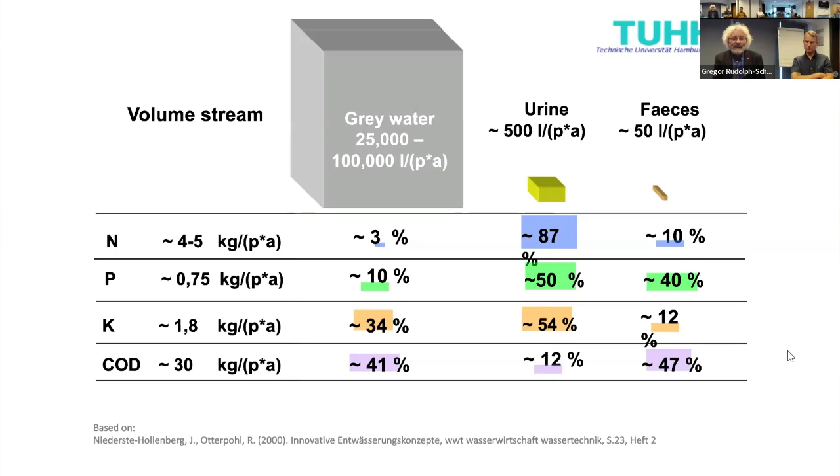So, my first point, what is in blackwater? So, we have grey water and we have blackwater, and blackwater is urine and feces, and this is separated here because you can clearly see the ingredients are completely different. And to make it short, in grey water we have the water, in urine we have the nutrients, and in feces, we have pathogens and antibiotic resistance. So the question may arise, why do we mix all these different streams which are separated already?

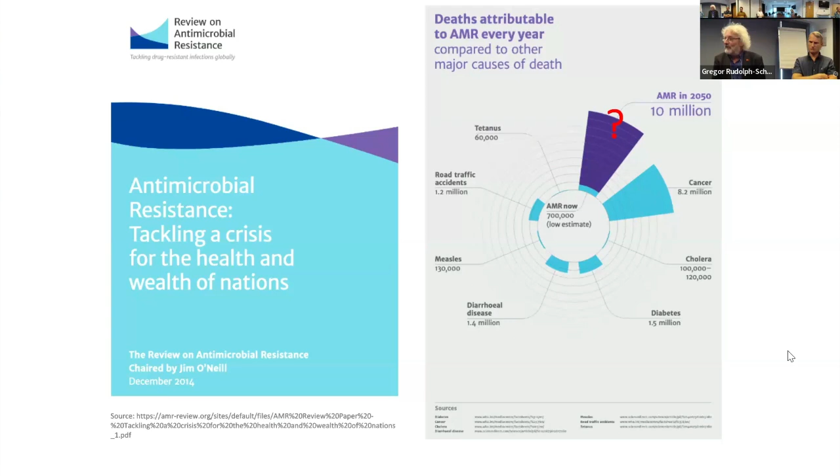And we focused in the project both on grey water and the mixture of urine and feces, which we call blackwater. And there are many studies about the risks of antibiotic resistance. I just quote one, and this says that in 2050 we can expect 10 million additional deaths because of antibiotic resistance. This number was questioned, but there's a recent, more detailed study, and they propose 8 million people. So not that big a difference, and anyway a big deal.

So what are the pathways? And these are the red arrows. So we have entries via feces. This is the main entry path. We have entries via hospitals also, but the majority is via feces of normal people. And if we have a combined system, which you can see on the left side, then we have overflows. If it is heavily raining, then we have this overflow, and then we emit pure wastewater mixed with rainwater to our waters.

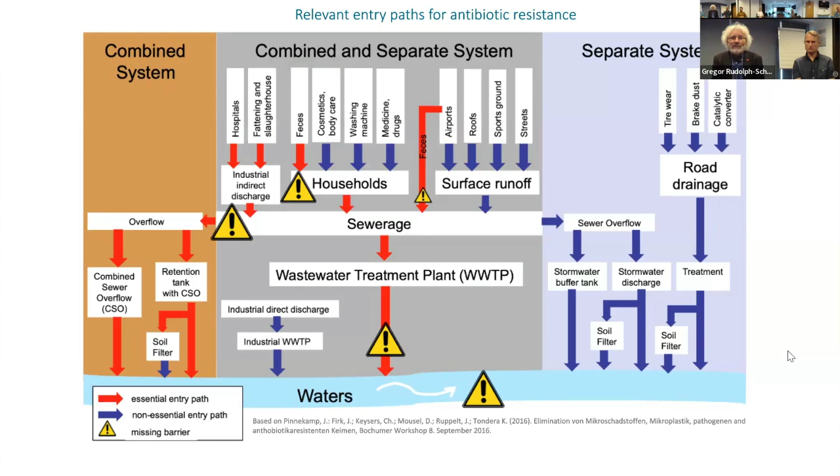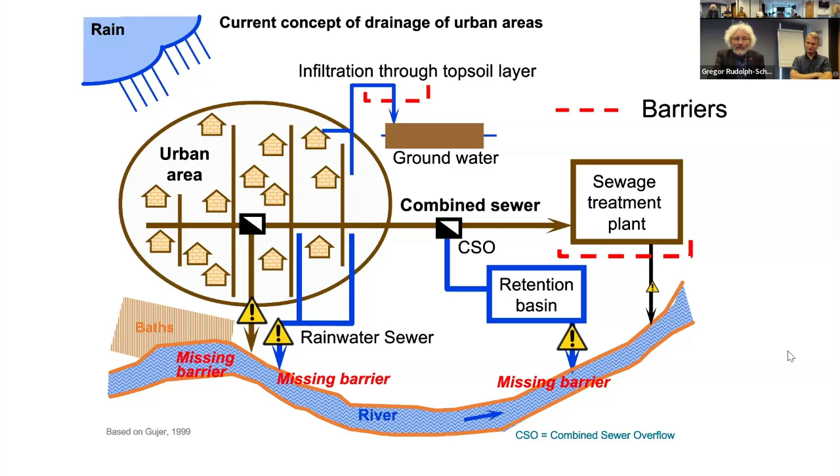And this is a major source of antibiotic resistance. And if you see this figure of our urban drainage system, then you see in brown all these combined systems, and then we have the overflows, and we have missing barriers against these hygienic materials and others. So even if we do not treat rainwater properly, we will have a missing barrier. And it is very important to have barriers. And how can we produce barriers?

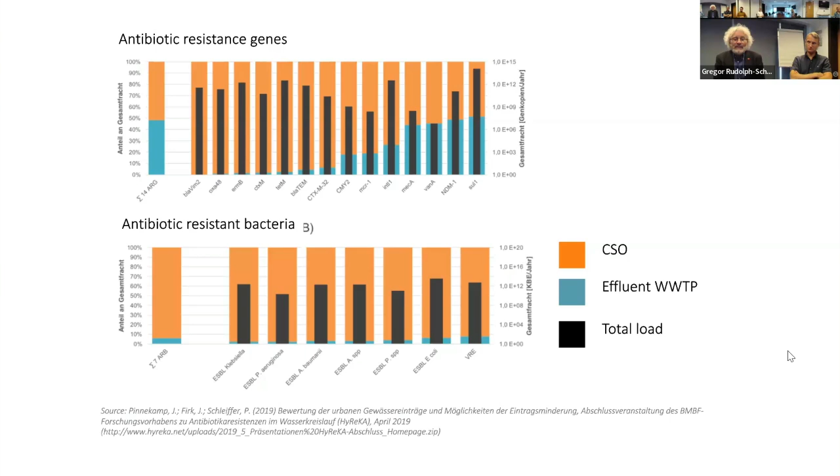But before I come to this, just the results of a recent German research project. The graph may be rather complicated, but I can conclude in one sentence. They found out that combined sewer overflows are the main source of antimicrobial resistance in waters. So we have a larger emission than from the treatment plant itself.

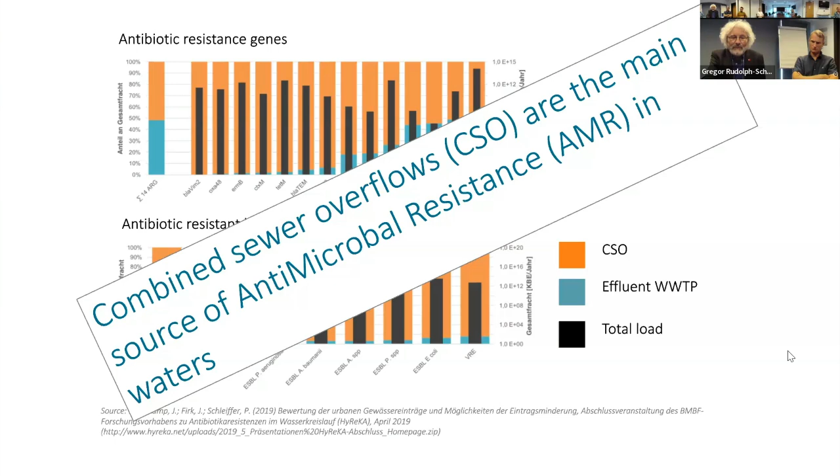So if we could have a concept of a different system, and you can see it here. So if we would not mix any black water with the rest of the rainwater, and you could treat it separately, that would be a first step. If in a second step, we even could separate consequently the rainwater so that we have a drainage system which we do not call combined, but separate system, then we would have no overflows anymore. And this would be the ideal system.

And in the first step, we just could separate black water. Then we would solve the hygienic problem and the antibiotic problem in the first step. And in the second step, maybe we have this very sophisticated system. So, but separation is not all. We have to treat black water and grey water in a manner that we really can make use of the water for grey water and avoid the emission of pathogens from black water.

And in the next presentation, Hamza will talk about the black water treatment and give you more insight into this. Thank you for your attention.

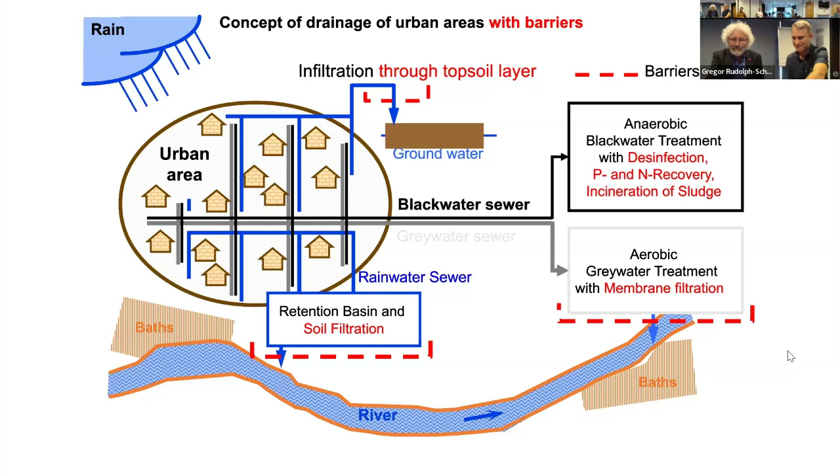Thank you very much, Gregor. So we will move on then from why we have the separation of black water in the upstream system in the households. And then we'll talk a little bit about how we in the Anchor demo sites treat black water. And when we're treating black water, we can not only get the benefit then of the decreased spreading of antimicrobial resistant genes, but we can also have the resource recovery in the treatment plants.

So I hope you're enjoying your lunch, because the next 15 minutes will be quite rapid indeed. But you can always come back to the presentation afterwards, and you're also very welcome to visit any of the Anchor demo sites to watch the numbers I will present in real life also.

So, the main point with blackwater, if you look from a wastewater treatment perspective, is that it's a very smooth wastewater. It's a very nice wastewater to work with. You have very low flow rates. They are very equal flow rates all over the day and over the week. So stable flow rates throughout the year, and they're also very stable in concentrations. So we just recently finished a master thesis where we looked, for example, into the Helsingborg demo case, and we could also confirm that we have this very small variation in the flow rates and in the concentrations.

The concentrations are also rather high. It's around 9,000 up to 10,000 milligrams of COD per liter, 120 milligrams of phosphorus, and around 1,300 of total nitrogen. So it's quite nice concentrations of both nutrients and organic material, and more importantly, stable in concentration. So you can have a solid treatment of these systems.

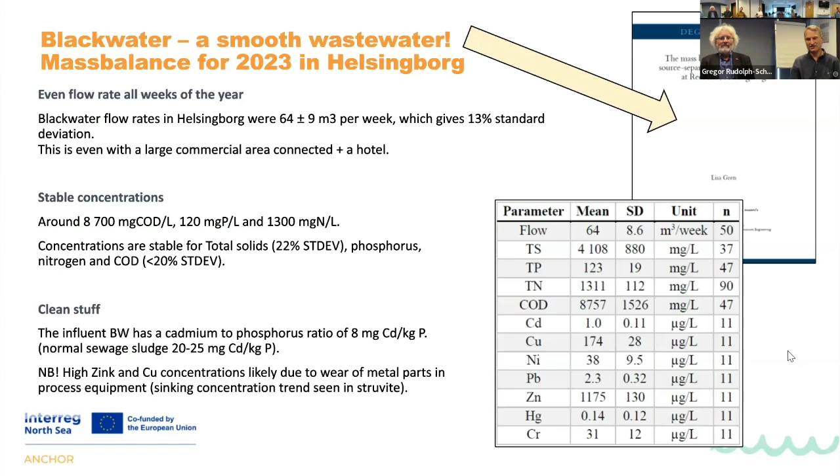So the blackwater treatment chain: already for 25 years on the university side, it has been suggested that with blackwater you should actually have anaerobic digestion as the core process to treat the blackwater. So that is different from a normal wastewater treatment plant where the activated sludge process is more in the center of things. And the anaerobic digestion chain is more similar to the sludge treatment system of a normal wastewater treatment plant. So you have the anaerobic digester and you have the nutrient recovery, etc.

The difference is, of course, that you have much more of the nutrients in the blackwater than in the sludge train of a normal treatment plant. So almost all of the nitrogen, for example, you have in the blackwater.

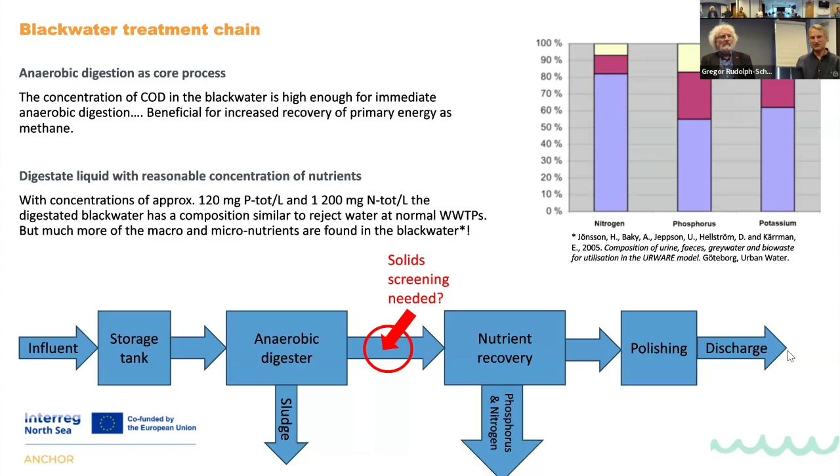So here you can see the treatment train in many of our demo sites. So a storage tank to equalize the flow, no screen, and then you have the anaerobic digester where you separate the sludge and the organic material. There might be need for solid screening, which I will tell you about shortly. And then we have the nutrient recovery steps. And in the end, if you want to do a direct discharge, you can also have the polishing steps.

So the anaerobic digestion stage, we know that blackwater is, and it's already proven now in our demo sites, suitable for anaerobic digestion. You can get a very good separation of the COD, but you need to have these sludge separation digester types, like the UASB digester, because you need to separate the solids and the hydraulic retention time from the solids retention

time in the digester. And then you get around 3 cubic meters of biogas per cubic meter of blackwater, and that is equal to an increase of around 60 to 70%, which we have now proven during the last year in Helsingborg, that we actually get this increased biogas production, which is nice.

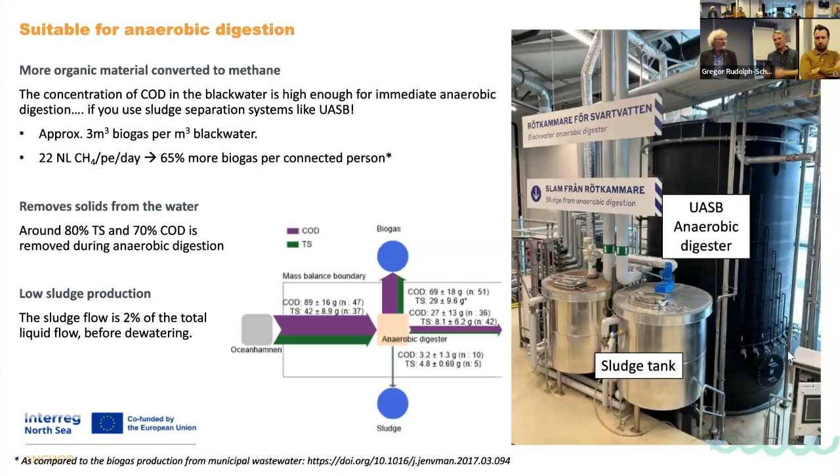We also see that we separate a lot of the solids, so around 80% of the total solids and 70% of the COD. You remove it through the anaerobic digestion, but into a very small sludge production rate. So actually only around 2% of the total liquid flow of blackwater, which is already low to begin with, is leaving as the sludge, which is very nice because that means most of the nutrients actually pass through the digester, which is what we want.

So the effluent of the digester then, we know now that we have separated most of the solids from that stream, which is nice, and most of the organic material, but we still have most of the nutrients in this effluent. So we have almost all of the nitrogen and a sufficiently large amount of the phosphorus still left in the effluent water. And those are also in mineralized forms, so they're good for extraction into nutrient products, like with struvite precipitation or ammonia stripping that we do have.

However, we have also noticed throughout the years that you can also have solids washout from the digester. We don't really understand what is the main cause of this sludge washout from the digester. It happens from time to time. So then we can have the solids concentration increase in the effluent, which of course is detrimental if you want to have a nice and easy running nutrient recovery downstream.

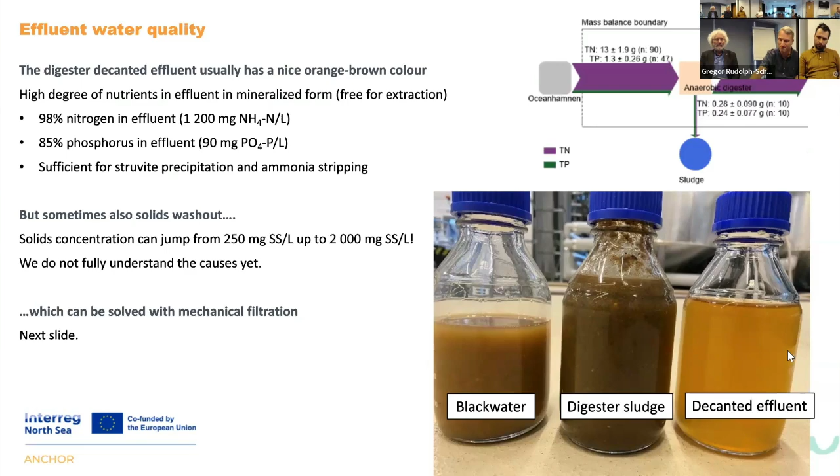However, what we have found is that even if we don't understand the cause of this, we know how we can remove the problem, which is, of course, the good engineering approach. So we have tested both the drum filter and the microfiltration as a sort of screening after the digester before the nutrient recovery. And you can see on this photo the results of both.

So with a drum filter, you have a 40 micrometer cloth screen. And then with microfiltration, you can go down all the way to a 0.1 micrometer screen. And if you do that, you have no solids. It's beneath the detection limit of 10 milligrams suspended solids per liter. But already with the drum filter, we noticed that we get a stable effluent just below 100 milligrams of suspended solids per liter. And that is sufficient enough for the downstream pretreatment.

And we also know now from over 9 months of operation that it also can handle very high solids loads if you get that sludge washout. So that is a very nice and easy to operate system which we are making now a permanent installation in the Helsingborg demo case. And I know they're also building it in one place in the Netherlands.

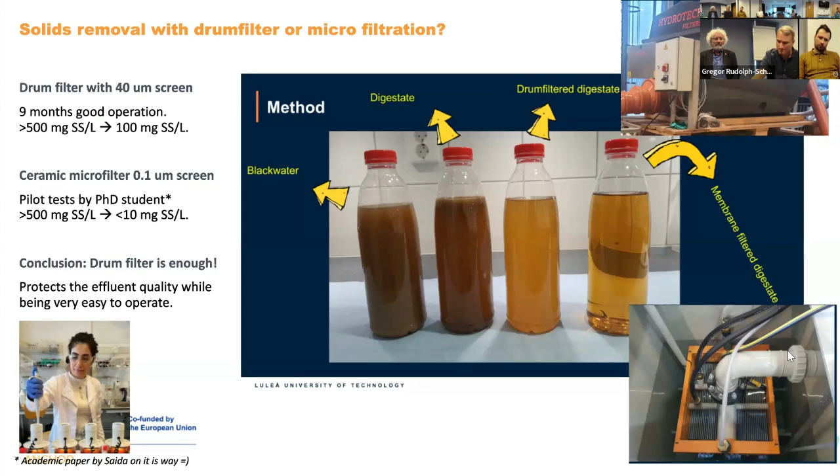So if you move to the recovery of nutrients, what is nice with blackwater is that you can have the recovery of nutrients in many different ways. You can have the total liquid fraction recovery, which we do not actually do in the Anchor project. It's more for the rural areas where you're close to farmland. So then you can do the wet composting with urea addition, or you can have the concentrate recovery of the whole liquid stream with, for example, distillation or freeze concentration. That we have tested in Helsingborg, and it's also been tested in the United States.

Then you also have the sludge fractions, which we do monitor in the Anchor project. So we know that the sludge quality is good, and that it is cleaner than normal sewage sludge. However, in our demo sites, the volumes we produce are actually quite small, so around 2 cubic meters per week. So we mostly monitor this sludge. We actually don't reuse it in agriculture in a continuous way.

What we do, however, is the extraction of nutrients. That is our main focus with the struvite precipitation, both in the Ghent demo site and in Helsingborg, and the ammonia stripping, which we do in Helsingborg.

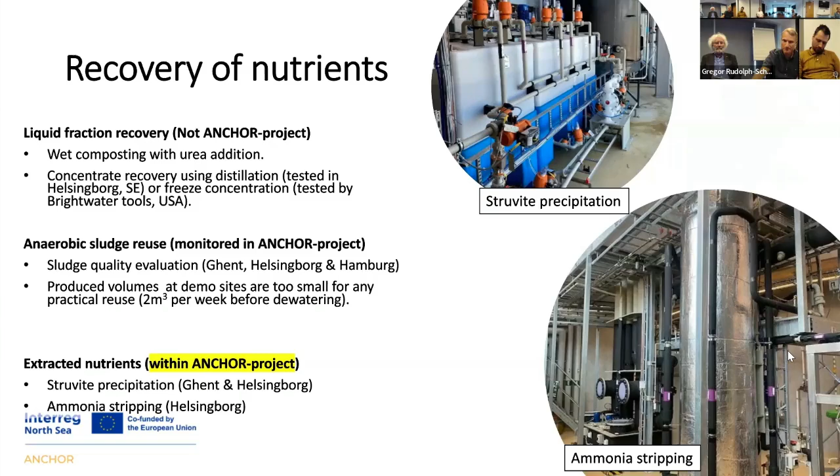So some results of the struvite recovery so far. What we can say is that it's a quite low cost technology, and a low chemical need as well. So you dose some magnesium chloride to get the struvite precipitation with the phosphorus. And that has been around on blackwater in a few places.

We also know that in the EU, this recovered fertilizer is in the EU fertilizer regulation. So that means you can both get the end of waste status, and it's also approved for ecological farming if you go through this EU regulation. So that's a really nice pathway to recovery of nutrients into farming.

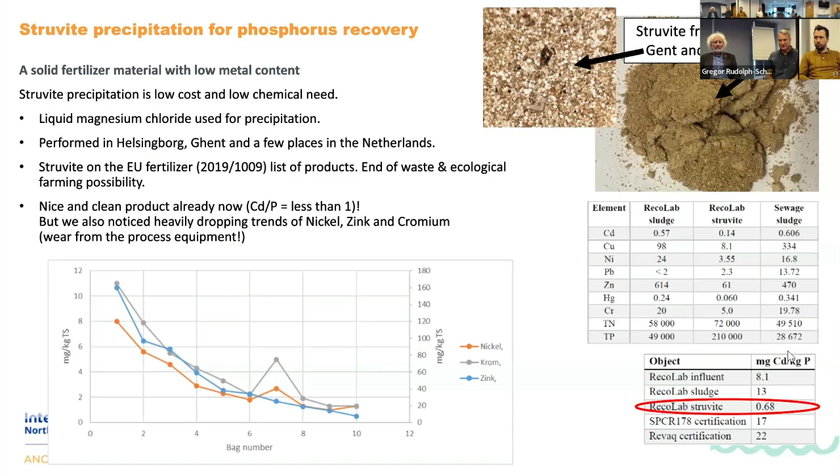So from the results we have so far, we know it's a clean product. And interestingly enough, we also noticed the decreasing trends from the beginning of operation. So that is likely wear from the process equipment. As you can see, the anti-corrosion protection of nickel and zinc and chromium, etc., leaching into the first bags of struvite. But even with that happening, we can see that the concentrations of, for example, the heavy metals in the struvite is very, very low.

For the ammonia stripping and ammonium recovery, ammonia stripping, I would say, is a proven technology, and that's been around for many decades. But it's also quite high in chemical usage and operational cost, because you need to add the sodium hydroxide, the sulfuric acid, and heat, etc. Even with all that taken into account, there is still a positive climate effect, because you also have to compare to the fossil nitrogen cycle, which you would otherwise use to create fertilizer. So even with this technology, you still get a positive climate effect.

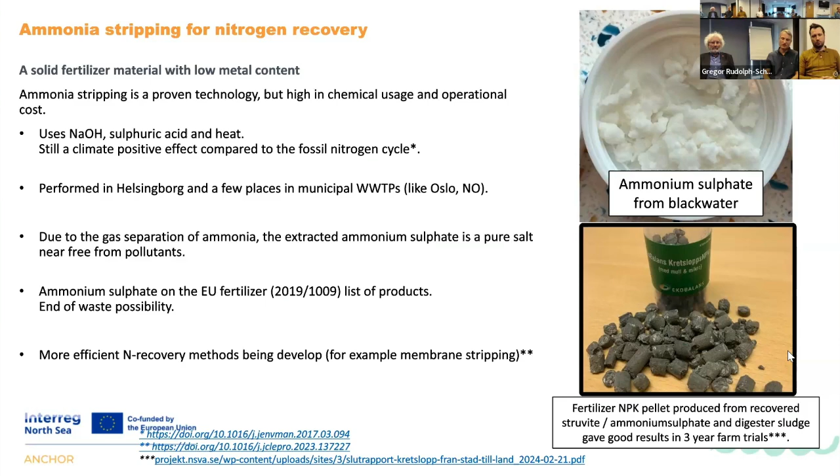It is done in Helsingborg, but also on a few municipal wastewater treatment plants, like the one in Oslo, for example. And the product you produce is a pure salt, as you can see here in the photos. And it's also on this EU fertilizer regulation list with end of waste. But I would also say that this is also a quite labor-intensive method, and there are more efficient nitrogen recovery methods being developed. Membrane stripping is one of the promising ones coming up. We've also tested the end products, these fertilizer pellets, and we have good agricultural yields for these nutrient products, if you're interested.

So the polishing is not really the central part of the anchor project, I would say. But if you have the direct discharge of blackwater, you also need the polishing, because if you have nutrient extraction, you still have some remaining phosphorus and nitrogen in the stream that is not really economically viable to recover. So in Ghent, they do mix the blackwater effluent with a greywater effluent to treat them and decrease the nutrient concentrations in the activated sludge system. And then they also have the color removal before the entire wastewater stream is recovered into the soap factory.

And in Helsingborg and Hamburg, polishing is not really part of the demosite process as of yet, because we're still working with the upstream process. But it's still important to mention that you need this. And for example, removal of pharmaceutical residues is not in this anchor project, but we have a separate LIFE application on this topic. We see that anaerobic digestion is good for removing some pharmaceutical residues and pathogens, but it will not be a complete treatment. So likely we need a dedicated process step, like activated carbon or carbon filters, for example.

So the outlook, I would say that what we see in this anchor project and over the past years is that we're moving now from university research into municipal operation of blackwater treatment. And as a utility operator that I am, I would say that the smooth flow rate and the stable concentrations in blackwater is what has really surprised me and what I really, really enjoy with blackwater. So on the downstream treatment side, there are benefits to work with the blackwater as a wastewater.

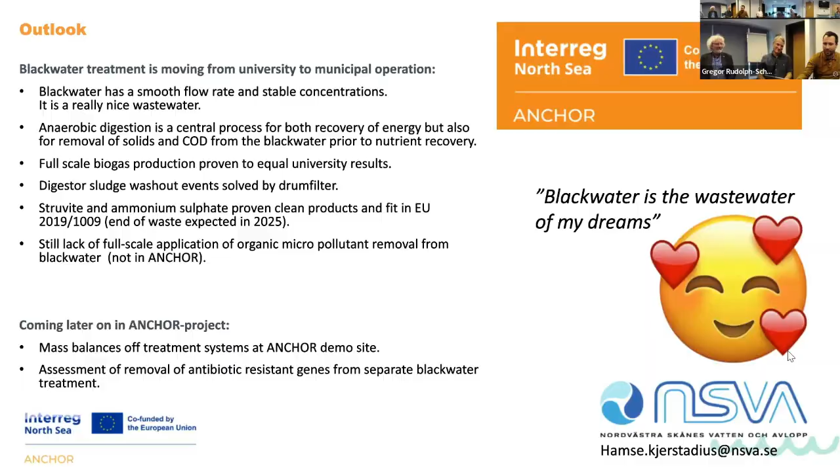Thanks a lot for the introduction, Hamse. My name is Dries Seuntjens. I'm a project manager for the case of DuCoop in Belgium. And I would like to talk a little bit about the economy in source separation systems.

So let's start off with the title of this talk. Where is actually the economy in source separation systems? So where means, what has value in our source separated streams that we are separating, and why is there value in it? Those are important questions to answer. Economy means market. Is there a market for this value? If we value something, it doesn't mean there is a market for this value.

And most importantly, what do we mean with a source separating system? I think Jörg explained it very well. It is separating the different streams at source and then using technology, like, for example, decentralized on-site water treatment, to recover the things and create value on-site and also for society. So let's try to answer these questions.

Where is the economy? And I think one important aspect is location. Every one of us is living in a different part of the world, and each location has its own economy, its own market. And within that economy, there is also you yourself as an individual, or as a group of people, a group of flats, or a district which is organizing itself. And so different solutions on source separation can happen on an individual level, where the financing and the responsibility is more on that individual level.

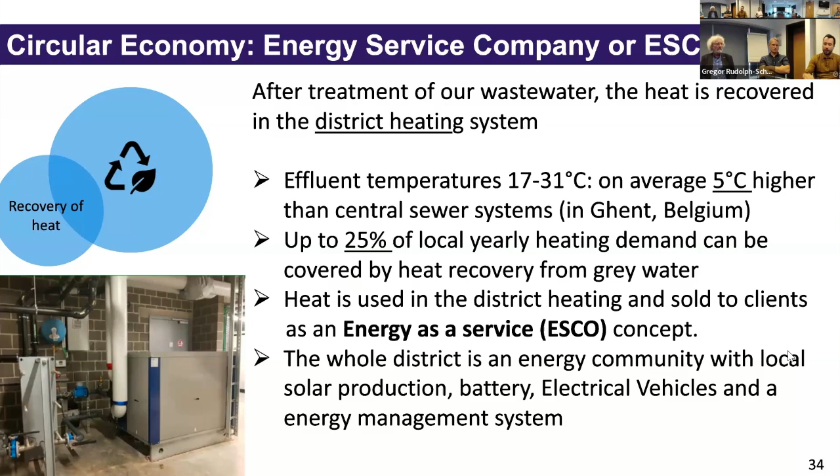Second example is the water service company. On a utility level, you would just say somebody who is managing a wastewater treatment company. So what we do here is that we treat our blackwater, kitchen waste and the grey water on site, and the water is reused in the nearby soap factory of Christeyns.

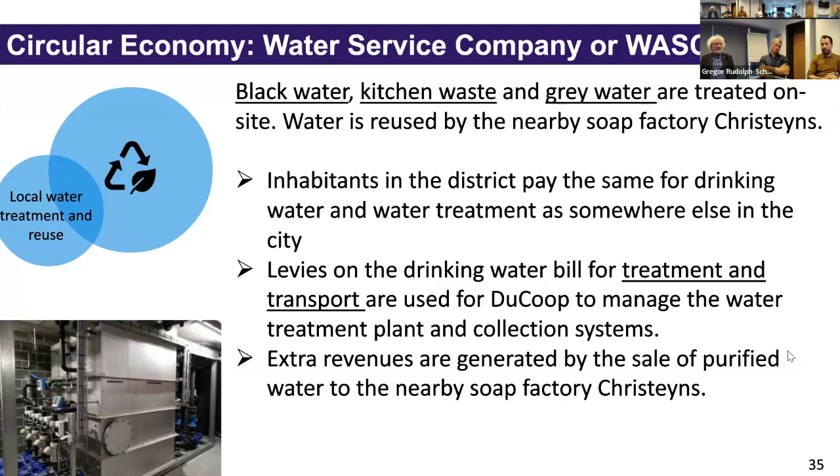So how do we manage to operate our wastewater treatment plant? The inhabitants in the district don't pay anything more for drinking water and water treatment than they would living somewhere else in Flanders or in the city. But still, when they are paying their drinking water bill, they pay levies for treatment and transport of the water. And this is used by DuCoop to manage our water treatment plant and collection systems. Extra revenue we create by the sale of the purified water to the nearby soap factory, Christeyns.

A third aspect is the waste service company, and that is the processing of the kitchen waste that we do. You can see there a picture of a collective kitchen waste shredder, which is installed in different locations in the district, where people can bring their kitchen waste and it is shredded and then transported to our water treatment plant. Again, the inhabitants don't pay more for this service than somewhere else in the city, but the levies are again coming to DuCoop to manage and operate our systems. Extra revenues that we generate by the production of biogas out of the kitchen waste are then further used to operate our systems.

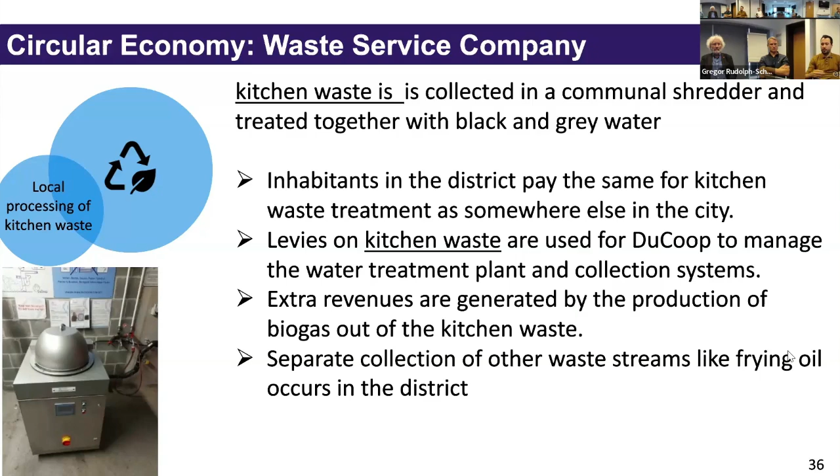And so potential revenues on a city or country level are reduced heat-related health problems, which are going to become a very important aspect with climate change and adaptation. And if we have nice urban greenery around, it will create increased happiness and productivity of the inhabitants and a larger valuation of the real estate present in our city.

A second aspect is the reduction of sewer overflows, as already highlighted by Jörg. We can say that the last 4 or 5 years we had very limited use of the central sewer connection. It's still necessary for an on-site water treatment plant to be connected to the sewer for maintenance or other aspects, but we have much more limited use of this connection, and this can help the city to adapt its system much better to reduce sewer overflows.

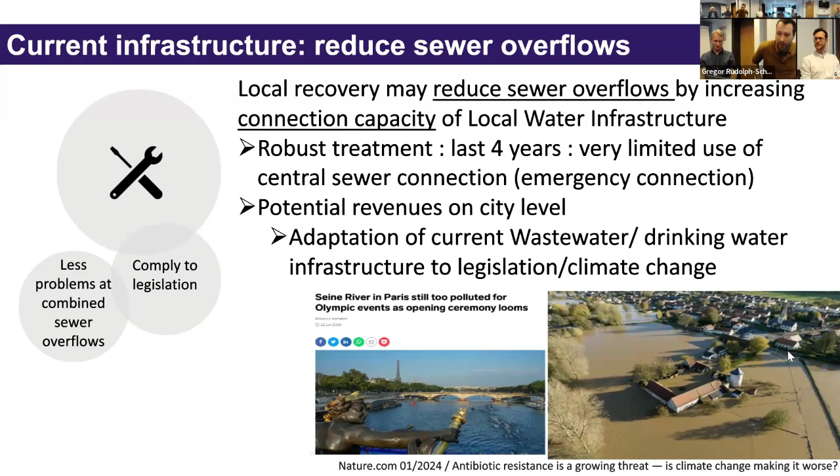Things you don't want to happen during the Olympic Games, but it happened. And some other pictures of last year, large floodings in Flanders. Things you don't want to happen, as these sewer overflows create risk of pathogen spreading.

And then the last one is new city developments. This local recovery may also increase the connection capacity of local water infrastructure. Within the Anchor project, there are new city developments both in Stockholm and Helsingborg, and there the municipalities see that the current sewer system is actually running at its limits to support these new districts. So they are looking into also implementing local treatment systems there. So again, the potential revenues are the avoidance of changing the current wastewater or drinking water infrastructure to support those new districts.

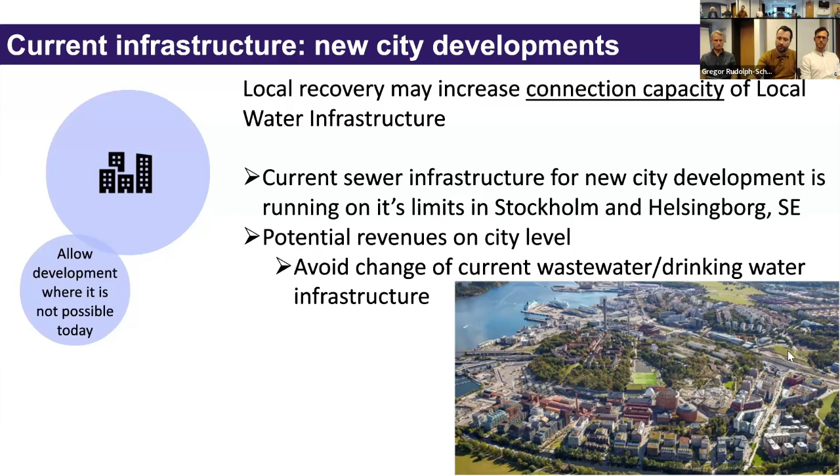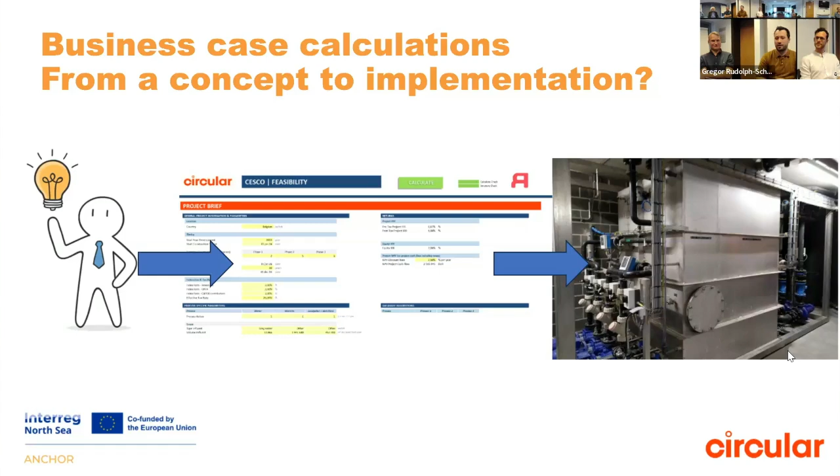So we have all these ideas. How do we go from, maybe you're working on a certain project, how do you go from this idea of implementing source separation to an installation that is operational? In the middle, you need a good business plan, a good business model on how to calculate these different scenarios. I'm not going to walk you through this whole business plan and model that we developed, but I'm going to show you some results of scenarios which indicate under certain conditions where source separation can be feasible.

The financial model is built on different aspects that are linked in between. So we have different pillars of this model which look into the governance model, but also the relation between heating and cooling and the water cycle, the electrical community, and then the water and green infrastructure. And then all these things are financially modeled. Like how much does it cost? How much is it going to cost in the future?

How quickly are inhabitants going to be inside the district, and how fast are the revenue streams going to be built up within the framework of such developments, and how are we going to finance it? So where is the money coming from? It's very important to model this type of new logistics and business models based on source separation. I'm not going to bug you with all the details, but in the end, it becomes a really complicated financial model that calculates through all these results.

And we can say that in general, if we want to apply blackwater treatment and recovery of, for example, energy and nutrients, like Hamza was explaining, we need a minimum scale, also very location dependent, of 1,000 housing units, but I think more on a larger block-wise city scale of implementing it. So you can get enough scale to really run the digester and all the nutrient recovery installations in a smooth and good way. We need a lot of it. We can improve the economy as well by combining certain waste streams, like they do in the case of Jenfelder Au in Hamburg. But we need sufficient scale.

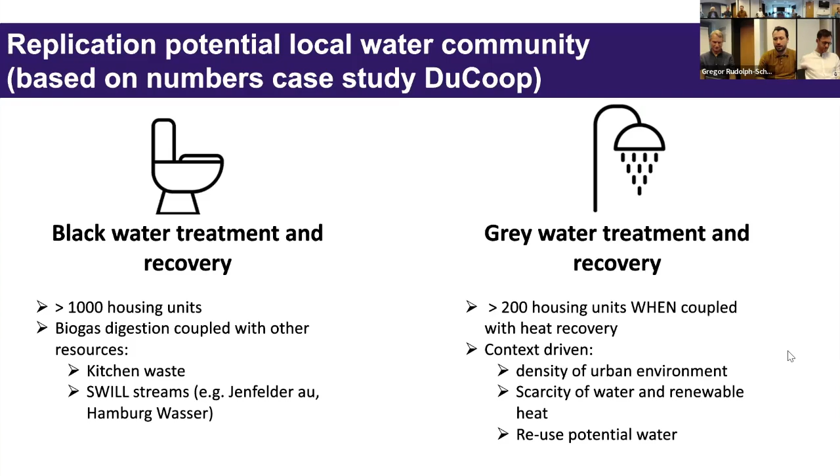So I hope with highlighting two of these cases I can give you already some inspiration of where the economy lies, what the possibilities are, and we can go into an interesting discussion. So thank you for your attention, and hope to see you soon.

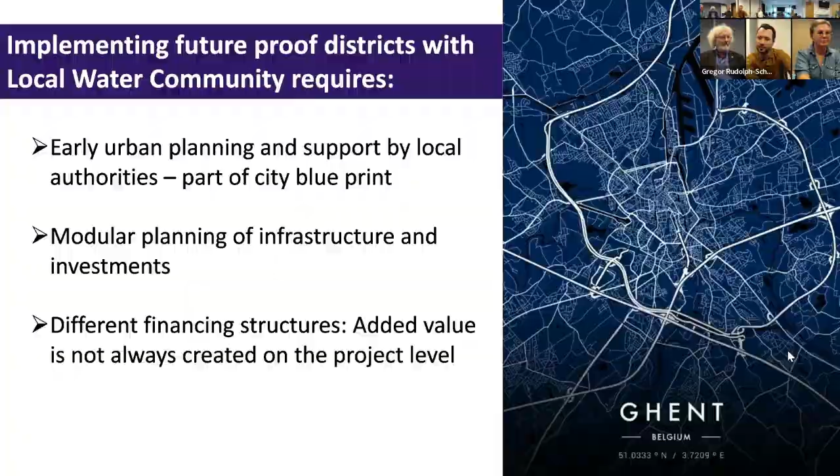Yes. You had something more here. Oh, implementing future-proof districts. Oh, thank you. That is a backup slide. Sorry. Before we go into the discussion,